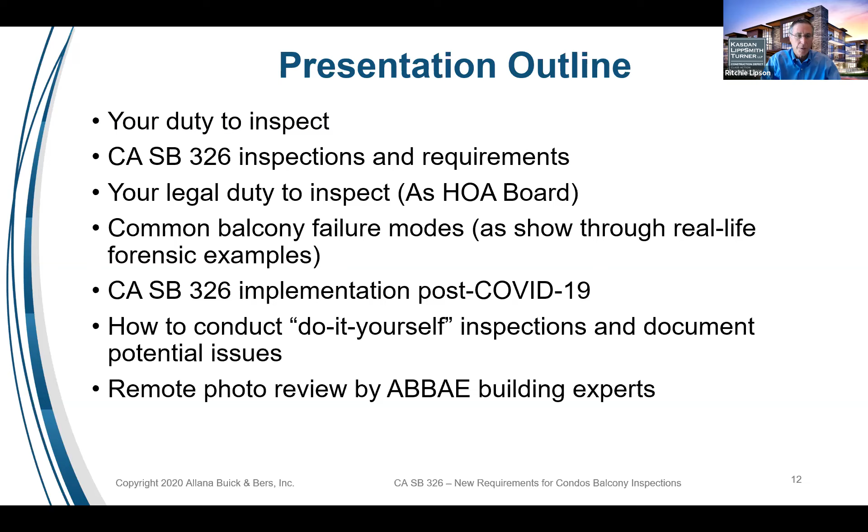Today, we're going to cover a few things. The first thing is the actual duty to inspect. It actually lives and breathes separate and apart from the requirements of SB 326, the inspection requirements for balconies. We're going to talk a little bit about, as a board member, the fiduciary duties that are attached to this duty to inspect. And then Karim's going to get more in detail about why this bill came about, what are common balcony failures, how do you implement SB 326 with COVID going on, and an innovative way of how you can do some self-investigation and self-examination.

So before we get too far into the details of what defects look like and how you can inspect on your own, we have to talk about what the bill says itself. It's not a very long bill. I encourage you all to go, you can just Google SB 326 and you can get the text. It's really a very short bill. But there is some important detail to know about. And the first thing is in the definitions section. So the first thing that is required is a visual inspection by a licensed architect or structural engineer of the exterior elevated elements.

Some of you might have heard about SB 721, which was a balcony inspection bill that applies to apartments. We were on the Legislative Action Committee for CAI, which right at the last minute carved out homeowner associations from SB 721. We may refer to some of that today because it's different, but we've both had some experience with 721, which has been in place for a year. So some nice, valuable lessons we've learned from it. So a visual inspection by a licensed architect or structural engineer is required under SB 326.

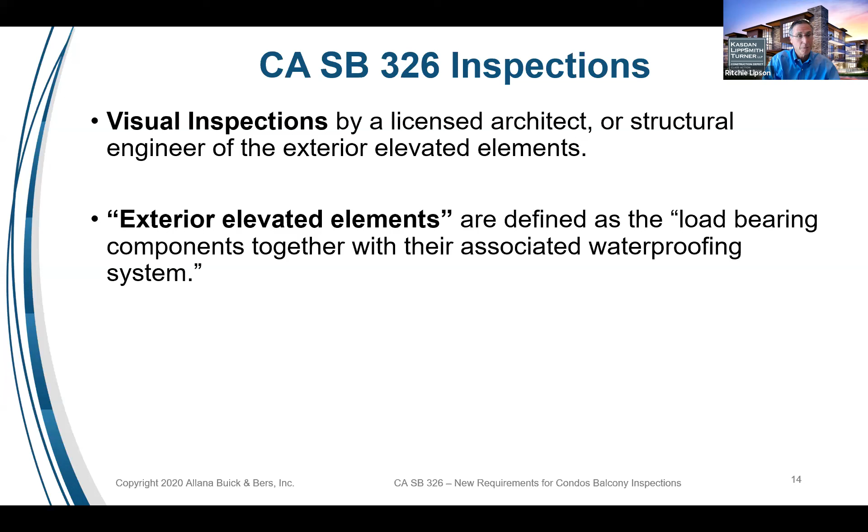What do you have to inspect? Exterior elevated elements. They're defined as the load-bearing components together with their associated waterproofing systems. What does that mean? Well, it's defined in the bill. So go ahead to the next slide, Karim, and we'll talk about what load-bearing components are and associated waterproofing elements. So associated waterproofing elements of wood frame balconies include flashings, membranes, coatings, sealants that protect the load-bearing components of exterior elevated elements from exposure to water. So it's basically everything that goes into creating the waterproofing system of balconies.

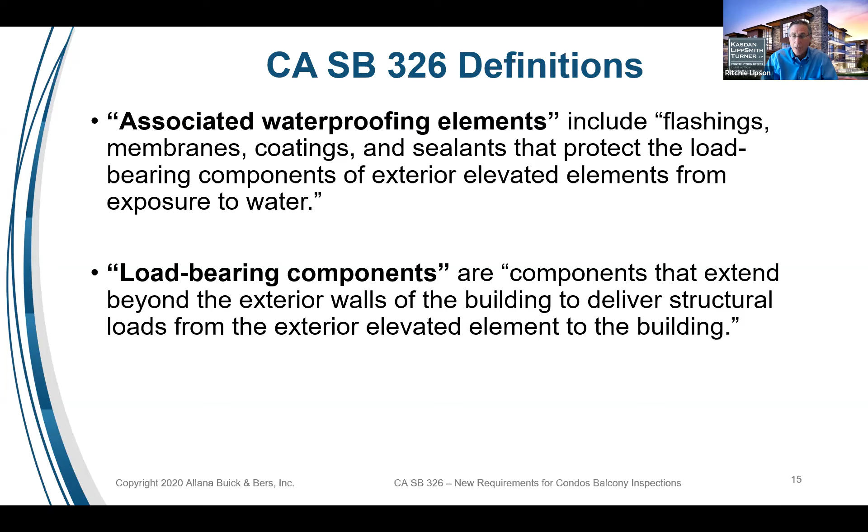And we'll talk a little bit about, it's also elevated walkways. We'll talk about that definition, what's included and not included. But it's a very broad definition. And when you see pictures of what goes into the waterproofing systems, which Karim's going to talk about, there's a lot of things that need to interact with each other properly. Otherwise, the balconies and the elevated walkways have exposure, which can deteriorate the wood framing.

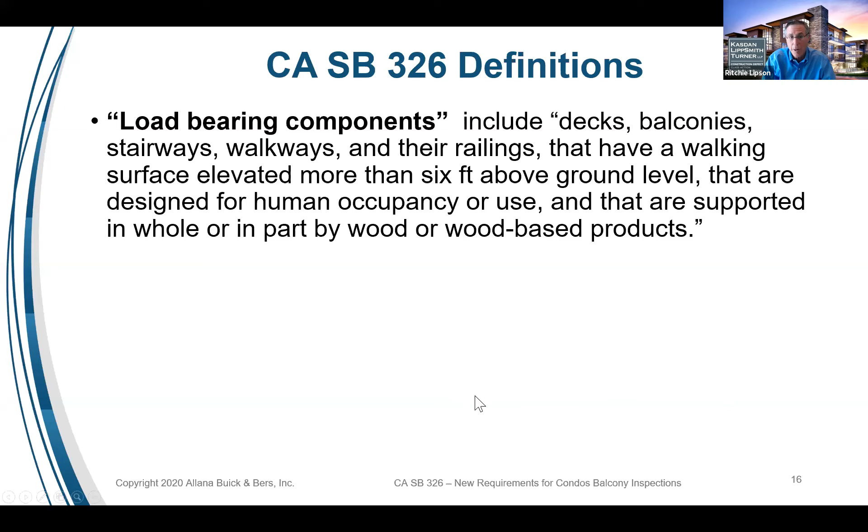A load-bearing component includes decks, balconies, stairways, their railings, and here's the important distinction. It has to be a walking surface elevated more than 6 feet above the ground level that is designed for human occupancy or use and supported in whole or part by wood or wood-based products. So what does that mean? Concrete decks, steel frame walkways, mid and high rises, not going to be applicable. You're not going to have to look at those systems because they're not generally made in whole or part with wood or wood-based products. Not included are the little Juliet balconies you see all the time. A lot of architects will use that. If you can't walk on them, it's not included in the definition.

What inspections have to be done and when do they have to be done? So the first requirement is that at least every 9 years you have to complete the inspection. And that's first round inspections though has to be done by 1/1/25.

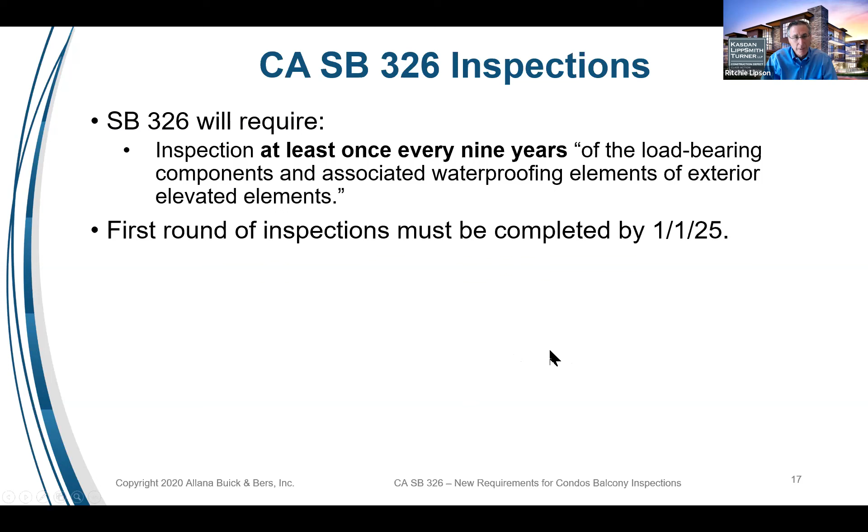And there's a real risk we'll talk about a little bit later about waiting too long. We've seen this in all the type of bills that have deadlines like earthquake retrofits in Los Angeles and other areas. People wait till the last minute, and then you can't get people to do inspections. You can't make people do repairs. So it's really important to start planning for this now. Go to the next slide, Karim, if you don't mind.

So what kind of inspection is required? And this was a lot of wrangling between the SB 721 balcony bill and this ultimate bill that came out, SB 326. In 721, apartment developers have to actually physically take apart and do intrusive testing of a percentage of the balconies. We were successful when this bill was passed to take that out. But there still, and Karim will get into this in detail, there still are a lot of requirements associated with how you determine if the waterproofing elements are put together properly.

So what the bill says is that the visual inspection will be the least intrusive method necessary to inspect the load-bearing components. It includes visual observation. Go back one more, let me just finish that. In conjunction with moisture meters, borescopes, infrared technology. So each exterior element that's found to be defective, decayed, or deteriorated or does not meet its load requirements, that would constitute a threat to life safety or health or safety. So this is a life safety bill. It's important to remember that.

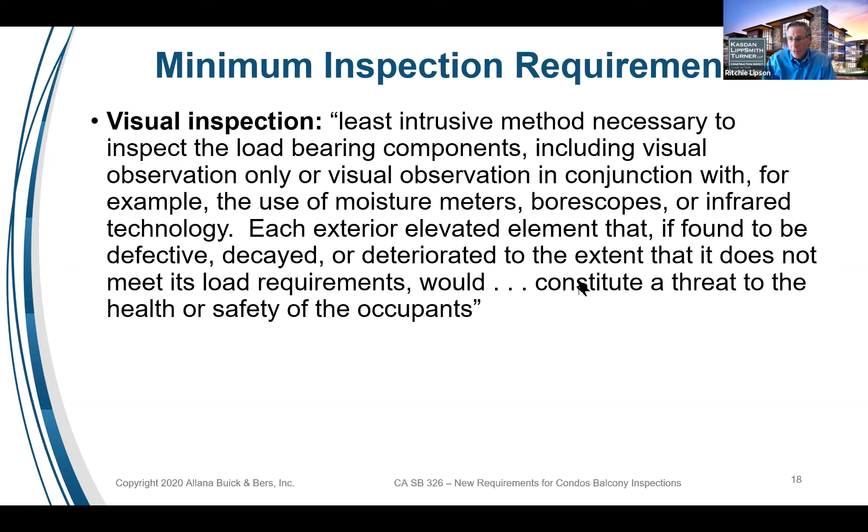And the burden is going to be on the architect and the structural engineer. And Karim's going to talk about how that burden is going to be satisfied through his inspection. So go to the next slide. Thank you. So after the inspections are done, what kind of reports are required? What do you have to do? The bill specifically provides that a written report needs to be issued. It doesn't really say when, unless it's immediate threat to life safety, but it does lay out the requirements.

So the first thing the report has to cover is a description of what the load-bearing components and associated waterproofing systems are. It has to state what the current physical condition is of both and whether there's any issue or immediate threat with health or safety. It has to identify what the expected future performance and useful life is, basically a reserve study analysis, and then go a step farther and say what repair or replacement is recommended.

That report has to be stamped by the professional, the architect or the structural engineer, and presented to the board. Then any impact on the existing reserve study needs to be incorporated. If a 10-year deck is now going to last 5 years, then you have to redo your reserves based on that new useful life recommendation. Go ahead to the next one.

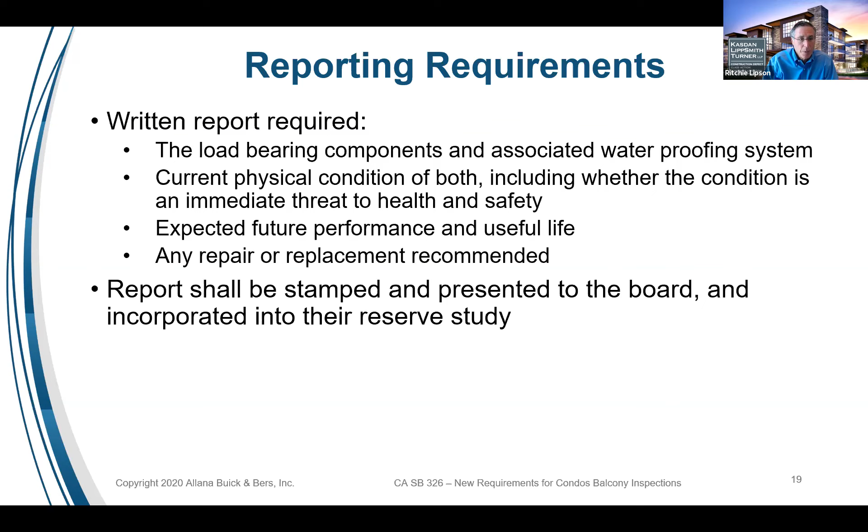Now here's the key. If the inspector determines that there's an immediate threat to safety or life, then that report must be presented to the association immediately upon completion. And you have to get the local enforcement agency, the building department, involved within 15 days. So basically, depending on the scope of this, you're going to have to shut down your elevated walkways, your balconies until you make repairs because it's a life safety issue.

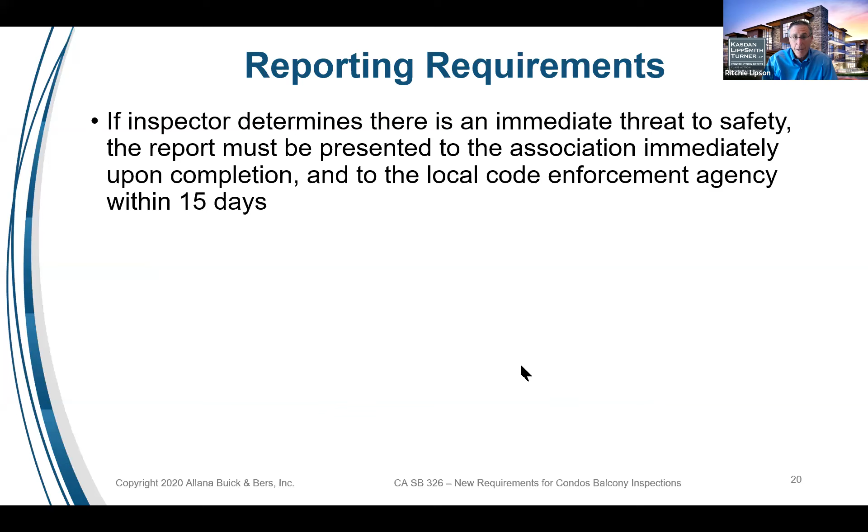What does the bill provide in terms of repair obligations? Okay, well, it requires that if you have a life safety threat, obviously you need to take immediate preventative measures, including preventing occupant access until the repairs have been inspected and approved by the local enforcement agency. So you're going to have to get a permit more than likely. And for that time, you're going to have to restrict access to the balconies or the walkways until this immediate threat of life safety is repaired.

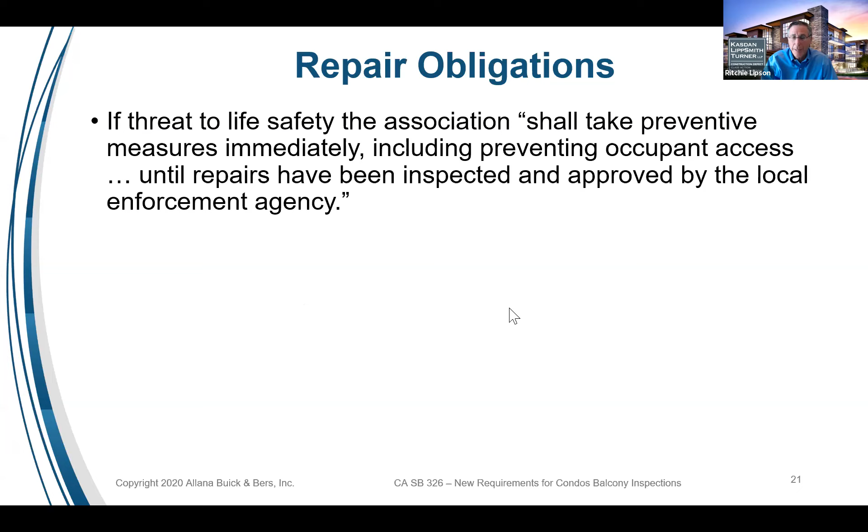And we've had multiple cases where we actually have to not allow members to get on decks because of either railing issues or where there's actual life safety or structural challenge with a balcony or elevated walkway. So that's what the bill requires, and it's detailed, and it's important that whoever you hire to do these investigations make sure that they comply with the bill, because you don't want to do it twice.

But let's backtrack a little bit and talk about this duty to inspect separate and apart from the SB 326 requirements. And it's important because if you're out doing balcony inspection and you already have a pre-existing duty to inspect, you need to look at everything. I mean, that was existing before SB 326. And we were actually successful to get this balcony inspection for the HOAs taken out of SB 721, the apartment bill, with this argument that there already was an independent duty of boards and associations to conduct investigations. So that's why we were successful in getting out of that initial bill.

The requirements that exist already are really threefold. One, CC&Rs. CC&Rs often, especially newer condominiums, will require expert independent inspections, either annually, could be every 3 years. You'd see those provisions in the CC&Rs, and it's important to look for those and find them.

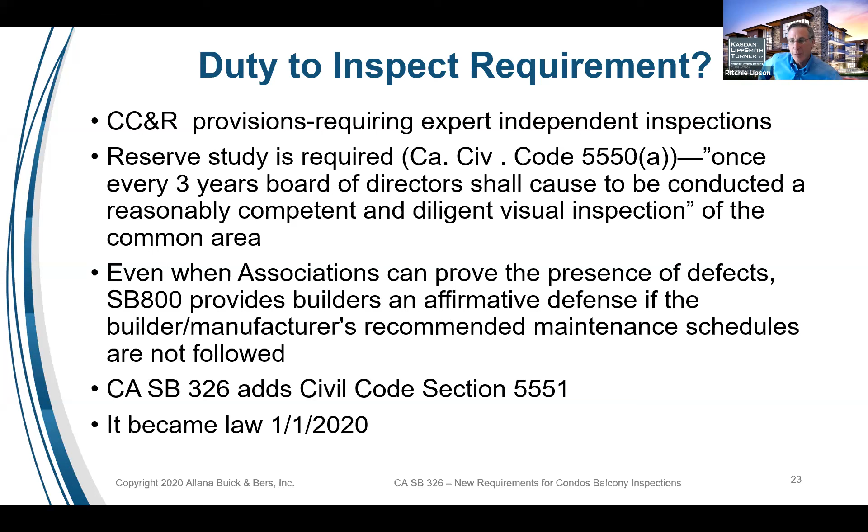There's a few cases that also have arisen around the country, and it really comes up like this. Association is not looking and investigating their projects. A statute of limitations is blown. You wait too long to bring claims. You then have to special assess members for repairs that could have been paid for by the developer. And then members in the community sue the association for your failure to investigate and failure to bring claims.

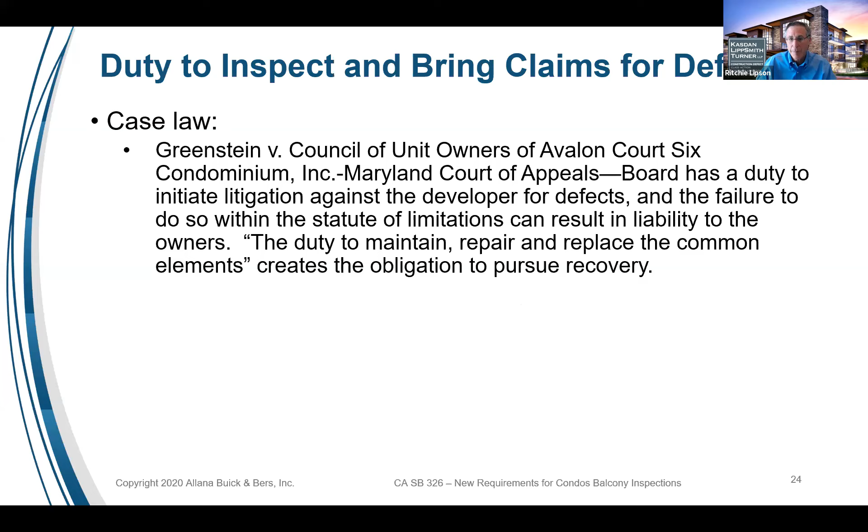So we've recently seen a case in Maryland, which basically said, if you've got a duty to maintain the common area, that equals the duty to inspect, and that equals this duty to bring claims if you find defects. You can't just stick your head in the sand. And there's another new one, go to the next slide, in South Carolina, about 1.5 years, 2 years old. Same thing, and these are Court of Appeals cases.

Now in California, we haven't had any appellate court rulings yet that are directly on point about this issue, but I don't think it's a large stretch to say, hey, you've got this fiduciary responsibility to maintain the common area in a safe manner, which equals reasonable investigation.

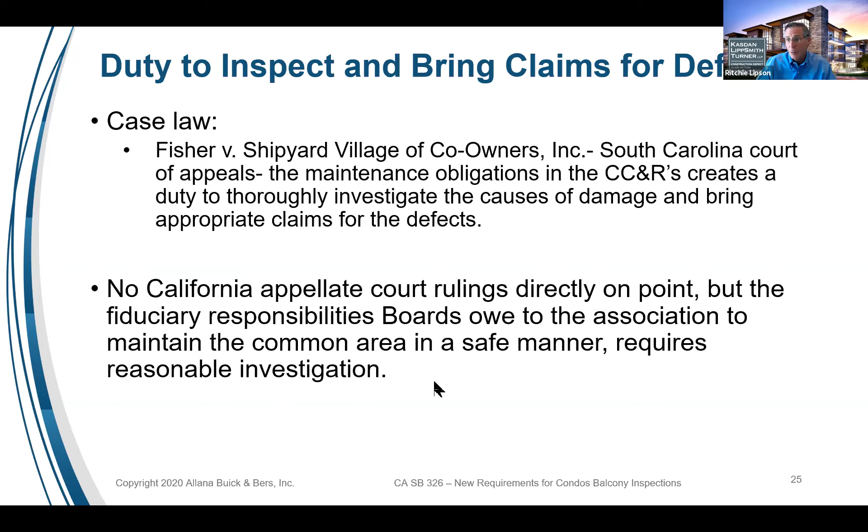And lastly, important thing to remember is that your D&O coverage, your directors and officers insurance that you have to cover these kind of claims, say you've blown the statute of limitations and now you special assess and members bring claims, they specifically exclude coverage for claims for failure to act when it relates to construction defects. And some of them are very broad.

Depending on what your policy says, you have a real exposure for no insurance coverage if a member brings a claim later against the board for failure to investigate and failure to bring claims for construction defects. So that's important, the way that ties into SB 326. Go to the next slide, Karim.

So that is the bill in 20 minutes or less. It's 3 years of lobbying that went on to get to this bill. It is very, very in-depth and it's going to have a lot of impact on associations the next couple of years. And I think when you hear Karim's presentation about the technical aspects of this, you're going to have a much better view of why it's so important to look at this. So I'll turn it over to Karim.

Thank you so much, Ritchie. That was very informative.

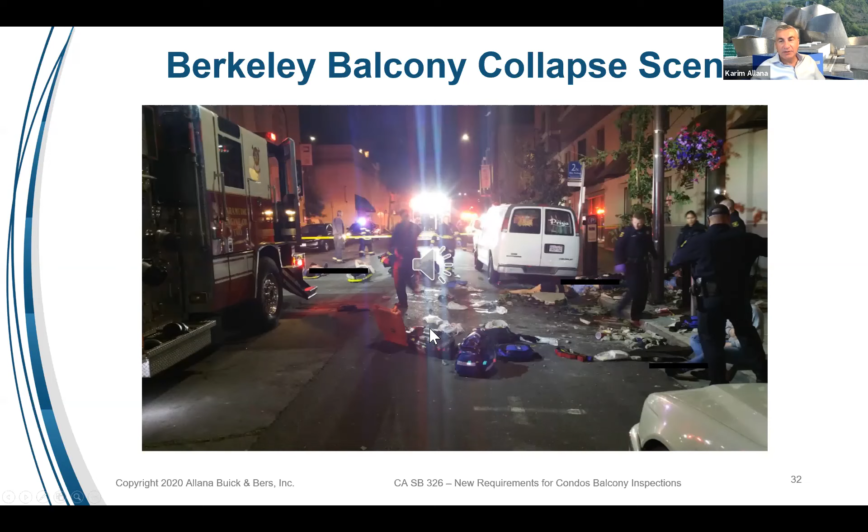It was a small balcony packed with a lot of people, but that's not the cause of the failure. Structurally speaking, this balcony was actually designed to be twice as strong as required by code. You could easily have 10 or 11 or 12 people on there, so it shouldn't have been an issue at all. The problem was water intrusion, and water was intruding into the balcony.

So this is a picture standing on a scaffold looking at the part of the structure that's still left on the building. Here's the balcony door above us, and here are the structural cantilevered beams coming out to pick up the balcony load, the floor joists and the rim joists. And you can see how rotted they are. These are made out of engineered lumber. Engineered lumber, like glulam beams and composite beams, is very, very strong.

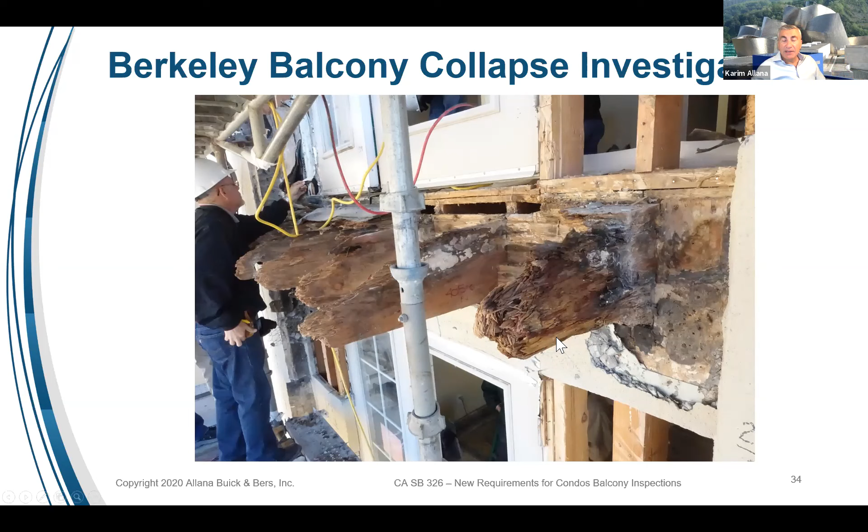And engineered lumber like this is extraordinarily strong, but unfortunately, when it gets wet, it can fail catastrophically. It can, boom, just go without any kind of notice, any kind of deep sagging. There was a little bit of sagging noticed in these beams, in these balconies, but then again, there were a lot of people on the balcony as well.

And so when you look at it from the outside, and I'll remind you of the picture here where we were seeing the underside of this balcony, it looked pretty clean. You don't see anything because the underside is stucco, and you don't really see any obvious signs that something is failing.

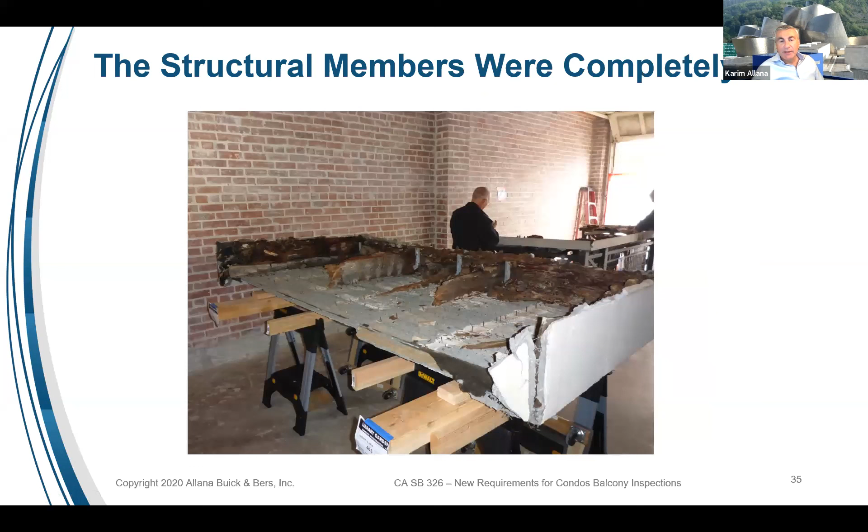In fact, the code at the time didn't allow for the underside of the balcony to be vented. So there were no vents. And so any moisture that got in would just get trapped. And that trapped moisture would just erode away and rot away the wood until it finally collapsed. So this is an extreme case, the Berkeley collapse.

And in the last 10 years, I've probably seen 20, maybe 30 such balconies that were about ready to collapse, had we not intervened, had we not seen the tiny little signs that we could make out on a visual inspection, which prompted more serious destructive testing and led to us making those balconies safe.

But had we not caught those, in the thousands that we looked at, there would have been maybe 10 to 20 that could have collapsed, that could have had this type of damage. So the visible signs are very, very low, okay? And so you have to be an expert to really detect it. You have to be an expert that understands what to look for.

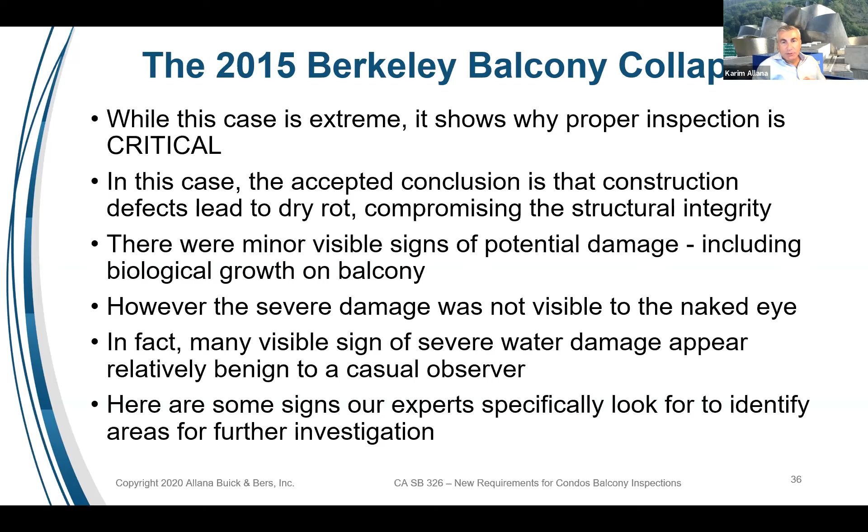And I'm gonna share those photos with you. I'm gonna share that experience with you today so you get a sense of what to look for. And so first of all, like Ritchie was explaining, there are a number of structures, elevated decks that are covered by SB 326. So what are they, right?

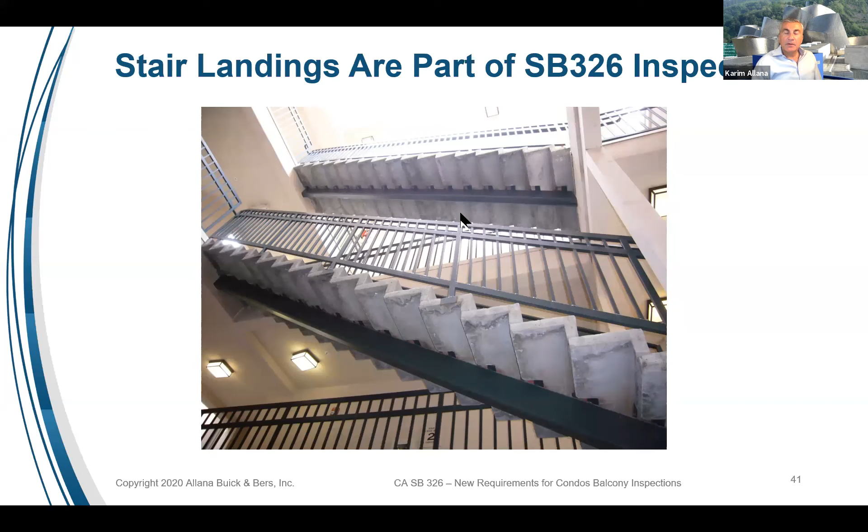Somebody also asked the question whether these balconies, which are covered and are not cantilevered, are required to be inspected. The answer is yes, these are also required to be inspected. So long as they're made out of wood and the supporting framing structure is wood, they're supposed to be inspected.

The other question that got asked is whether a deck structure that is on top of a garage or a flat roof also needs to be inspected as part of SB 326. SB 326 simply says that it's a walking surface. People are going to be walking on it. And if there's a part of the roof that you're using as an amenity deck where people can congregate on it and utilize it, then that would qualify.

I can tell you that I walked on many roofs in my lifetime. And I remember the scariest one that still sticks out in my head. I was walking on top of a gymnasium roof, and this gymnasium was 30 feet high, so there was a very high ceiling inside. I was walking on a very firm roof, and my foot went right through part of the roof. Half of my body was down through the hole in the roof because the roof was rotted.

Any other questions? Okay. Thank you for your questions, because it's important for us to understand what you're thinking and to be able to answer your questions. So now I'm going to talk about, does water leak? How does water leak? How does damage actually occur? This is a plan view of a balcony. Here's a sliding door at the top.

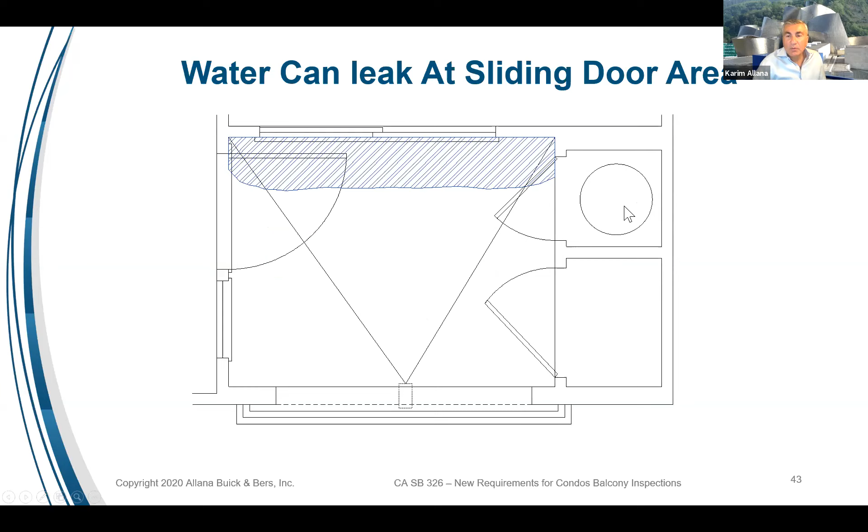Here's a little closet that has the hot water heater. This is a little storage closet off of the balcony on the right on the bottom side. And so you could have a side entrance door.

When you look at a balcony on the perimeter, it's got lots of doors. You know, it could have a sliding door, it can have man doors, it can have entrance doors. And so the perimeters are quite busy with flashings and door thresholds, which can all become a part of an area where water can get in.

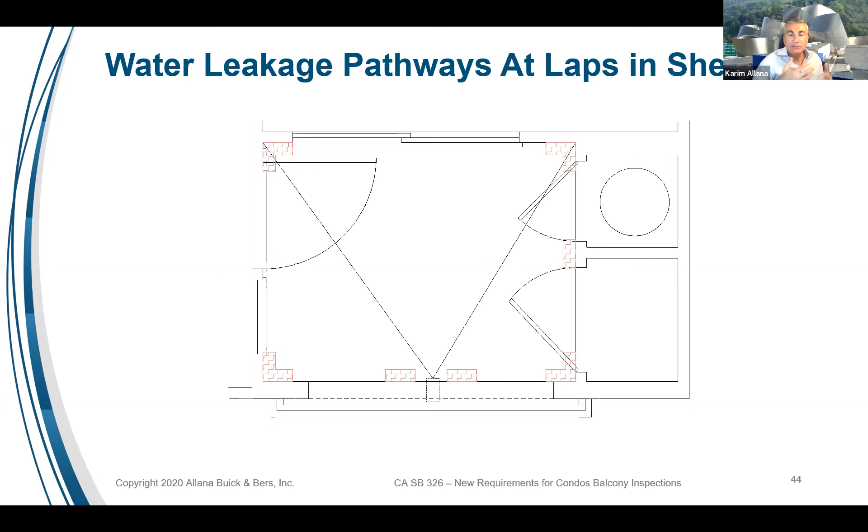So each of these areas, at doors and ends and corners, they all have sheet metal type flashings that are lapped. And the laps in the sheet metal flashings can become a pathway for water. So each of these red highlighted areas are potential for water intrusion. And there are many, many such areas for water intrusion in a balcony.

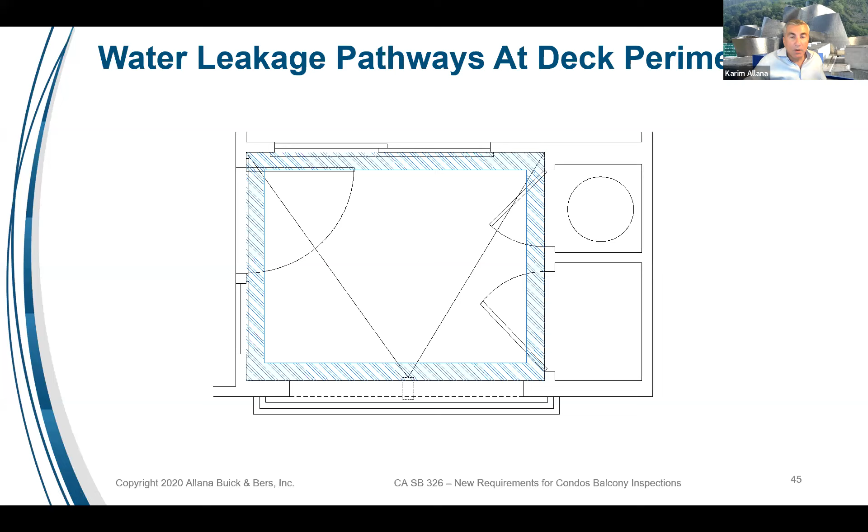Like the whole sheet metal flashing itself may have been done wrong. And if the perimeter of the deck isn't properly watertight, water could intrude from any one of these perimeter areas. Actually, it doesn't have to fail right through the waterproofing membrane. Another vulnerable area is in the front, the scupper, because all the water gets directed to the scupper. The area in front of the scupper could be potentially leaking.

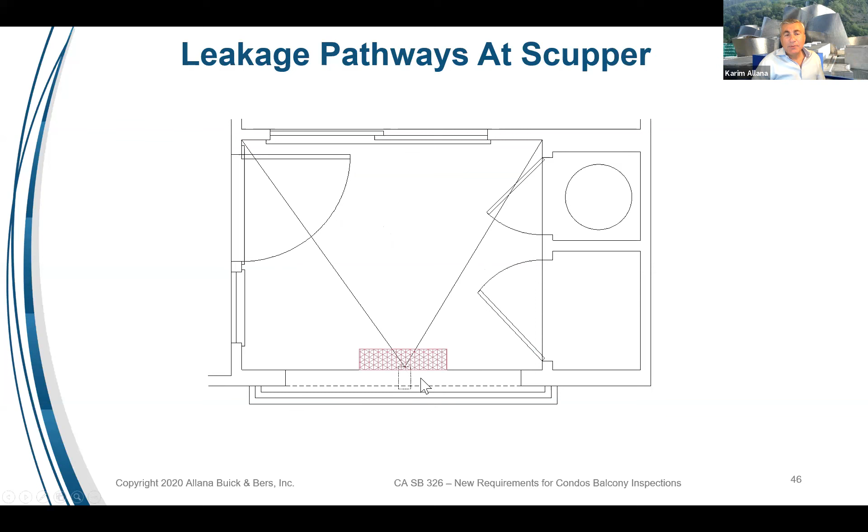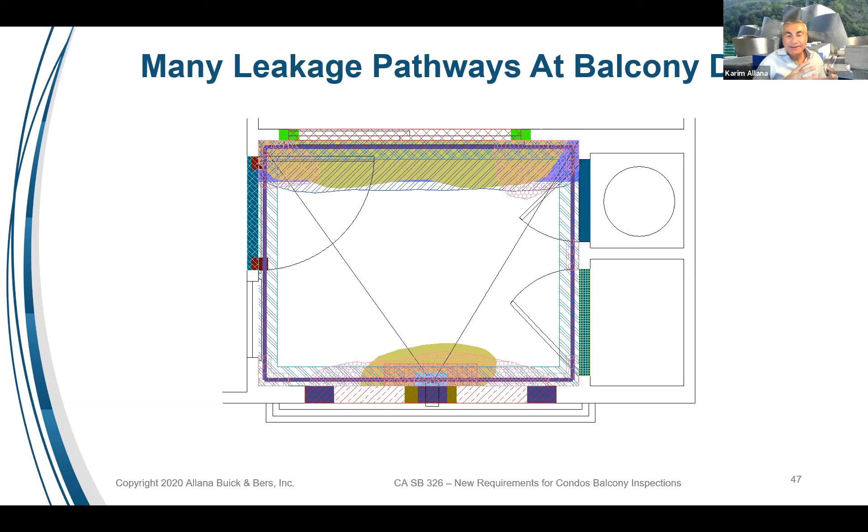When you add up all the places in a balcony that are vulnerable, this is just a composite drawing that shows all the different areas that could introduce water into the balcony. There's a lot of areas where water can come in, right? So as an expert, as I look at this, I know that I'm looking for all the vulnerabilities on a balcony like this. And ultimately, if there is leakage, most of the water stays contained in the balcony or the elevated deck assembly or the stair landing.

So if you look from underneath, you don't see much. You see very, very slight signs of leakage. Most of the water stays contained in the wall cavities. Most of the water will stay contained in the deck itself, in the structural members of the deck. So water just gets absorbed like a sponge into these areas, and it'll just sit there and start to rot things away because it's coming in from all these different areas, and you don't know it, right?

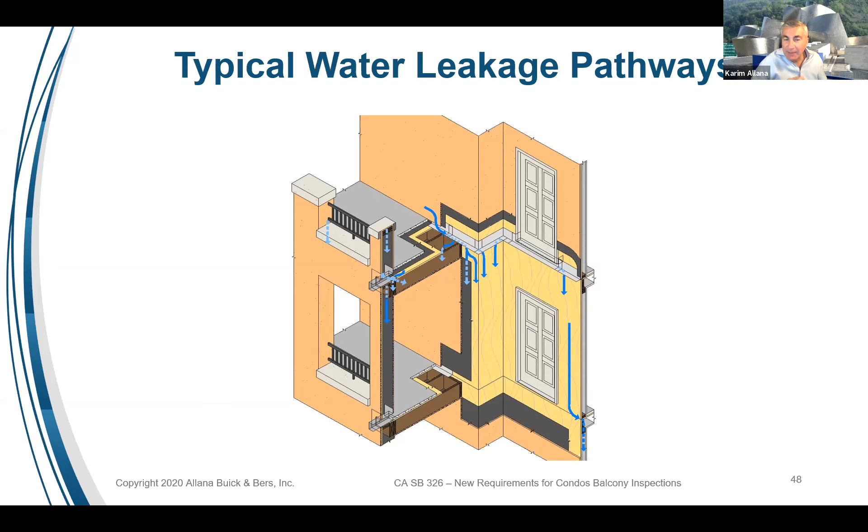So I'm looking for signs that I've seen when water intrusion is happening like this. There are some signs, and I'm going to show you what those signs are and how they look, what's the tip of the iceberg. And I'll talk about the tip of the iceberg a lot, but these signs are not always obvious. These are pretty difficult to recognize.

One of the questions that came up was, do you need to open an area on each balcony and walkway to complete the inspection? The fact of the matter is that we need a certain amount of exposed area, but we don't necessarily need to do destructive testing on every balcony. And I'll show you what we need to see and what we are typically looking for before we'll get into the destructive testing.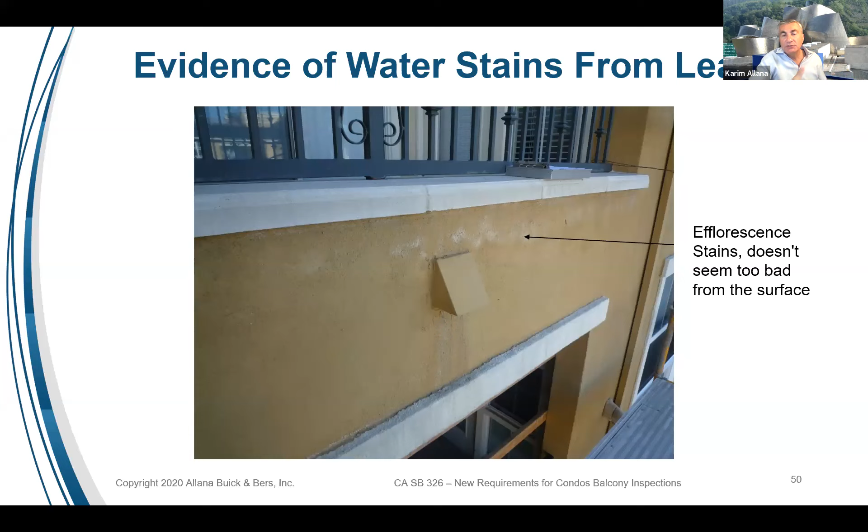As the water that's inside the wall is drying out, it brings the salts that are in the cement plaster, in the 1-inch thick stucco. It's bringing the salts out of the walls, and it's then drying to the surface. So these salts are getting drawn out with water.

So if there's efflorescence, that means there's enough water getting in behind the stucco that's now trying to dry to the outside, which creates this staining. I look for this and I go, I've got to look at this more carefully because this could be a problem.

Here's another obvious sign, right? There's a little bit of staining that we see. In fact, there's a little bit of staining you can see even on the ceiling of this particular balcony. And there's obviously some staining here. You can see that the staining is not just water dribbling down the stucco, but it's definitely got some coloration to it and some brownish type of colors to it.

And usually wood and waterproofing membranes, when they get wet and water runs off of these wet areas, it produces what we call tobacco juicing. Tobacco juicing is brown colored stains that, to use a crude word as the way it came from, is when people were chewing tobacco and spitting, you see the brown tobacco juicing.

And that's really where the terminology came from. But it is a term of art that is used by the roofing and waterproofing industry a lot. And they talk about tobacco juicing. And so tobacco juicing is what we're really looking for. And it's very hard to see, but all you see here is a very slight amount of staining in the ceiling here, and you see some strong ceiling stains in the front part of the balcony.

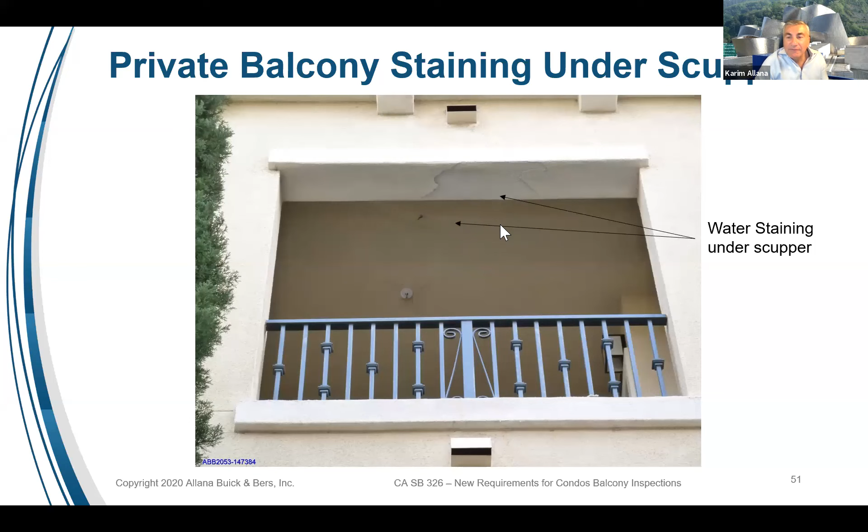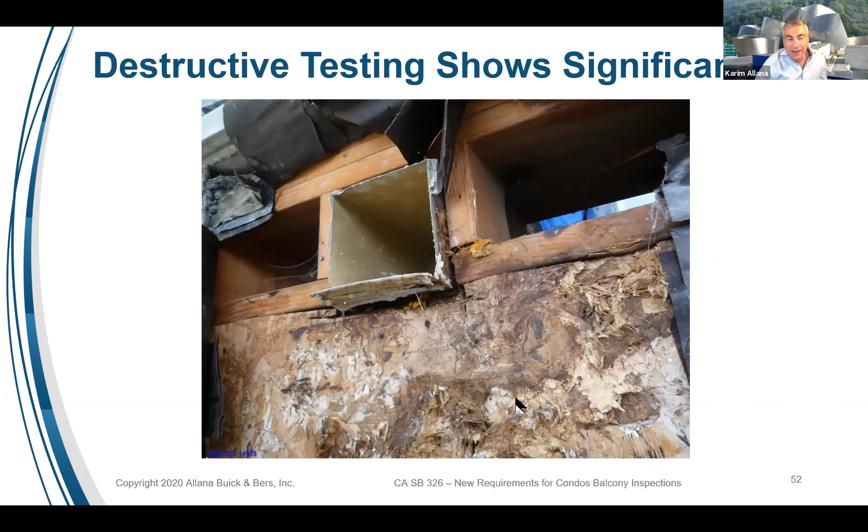Okay, and to me, I'd be investigating that. Here's what we find when we get behind such minor staining. See a lot of significant rot. So a small little stain, even a couple of drops of tobacco juicing type of stains, could mean that you have such severe rot. Okay, so the warning signs are very, very little. They're not easy to spot. So you want to see the warning signs of these.

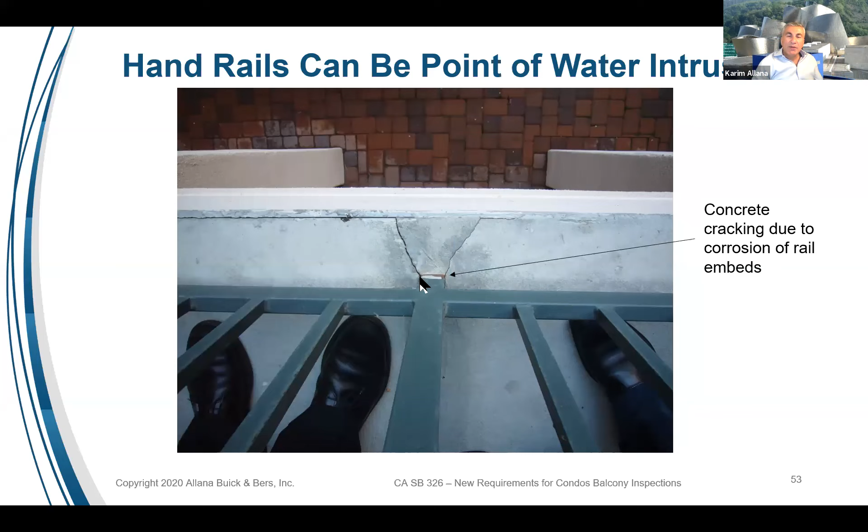And here's one of the warning signs that I look for. Here's a handrail penetration that has cracks emanating from it. You can also see at the base of this handrail, there's some rust. Okay, there's rust because there's moisture accumulating. It's causing that handrail to rust, and it's causing that concrete to blow out and spall, because when metal rusts, it expands. And as it expands, it's pushing the concrete, it's cracking the concrete. And so I'm looking at signs like this thinking, okay, that could mean that there might be a waterproofing flashing failure here, because there is rust going on in this handrail.

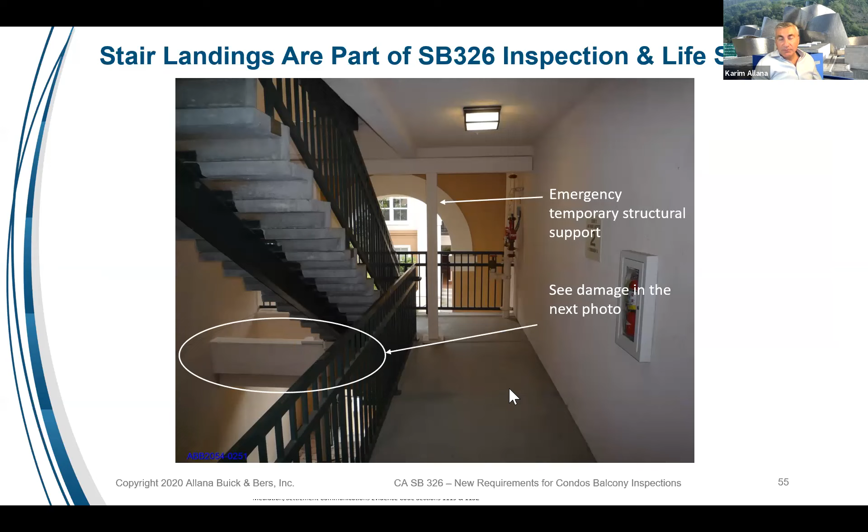Here's some more examples. Here's a stair. In this instance, I saw some damage down here at the balcony. There were some cracks, and I'll show you a close-up shot of this. And before we even did any destructive testing and opened it up, I asked the owners to shore it. So here's the temporary shoring and columns that were put up just to make sure that this staircase remains safe, okay, for people's entry.

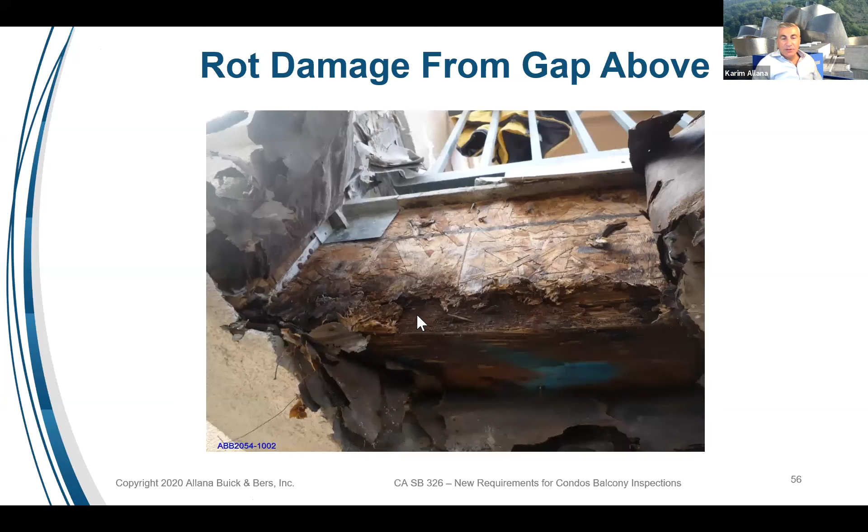And you can see that the amount of opening in the wall is not that much. You only have this much opening in the wall that's allowing wind-driven rain to come in. So it's not like open to the sky completely, but there's some level of wind-driven rain that falls on this balcony, on this landing. Here's a close-up shot of how damaged this was. Okay, so it has quite a bit of damage from this landing.

Anytime you see water coming out through the crack of a stucco wall, it's a problem. Generally, that shouldn't happen. Cracks should be minor. They should be hairline. Water can get inside of the cracks, but there's building paper that usually manages this water. If it's incidental, it's not going to cause a major problem.

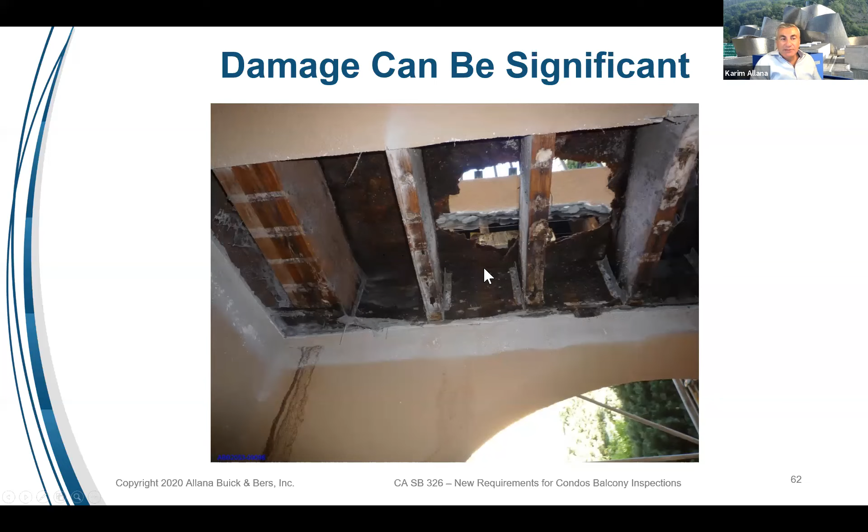And then when you see that, the damage could be a lot more extensive. So that's really an important distinction. It's important to know that you're looking for minor little damage like this, okay? Any questions about this?

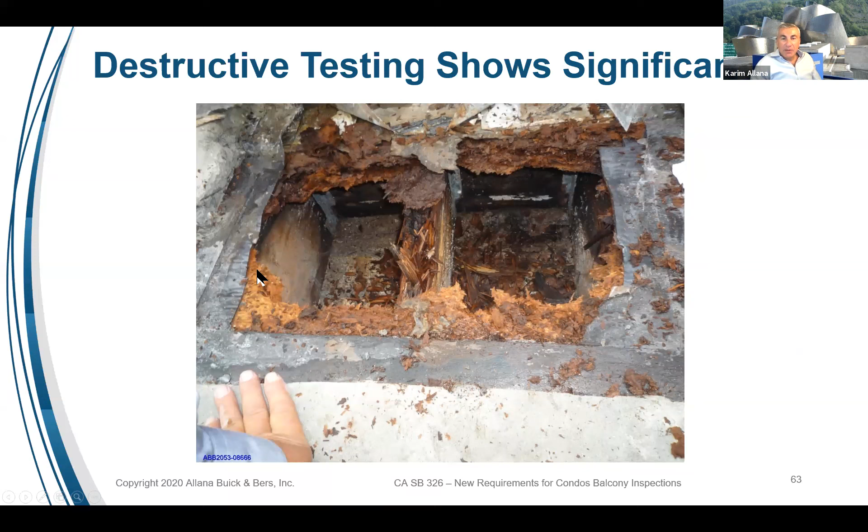So here's some more, again, here's a topping slab. This is looking at it from the top down. This is how rotted the plywood is, okay, and the framing members. And if you were walking on this concrete topping slab, you never would have known that the wood underneath it is so far rotted.

The unfortunate people that were in the Berkeley apartment collapse, they were walking on that deck, they didn't know. Had they known it was rotted like this, they wouldn't be walking on it. So the problem is that you can't see it. And that's why this law and this bill was passed, so that people would be alerted to significant damage that could be there. The signs of this damage are very, very low.

So a question that was asked was, if a complex has recently been painted, how would you do the inspection? So if a complex has been recently painted, if you wanted to do a thorough inspection, you would need to do a probe type of inspection, where we would drill little holes, go in with a borescope and look at critical elements. You would need an expert. You wouldn't be able to do it yourself, okay?

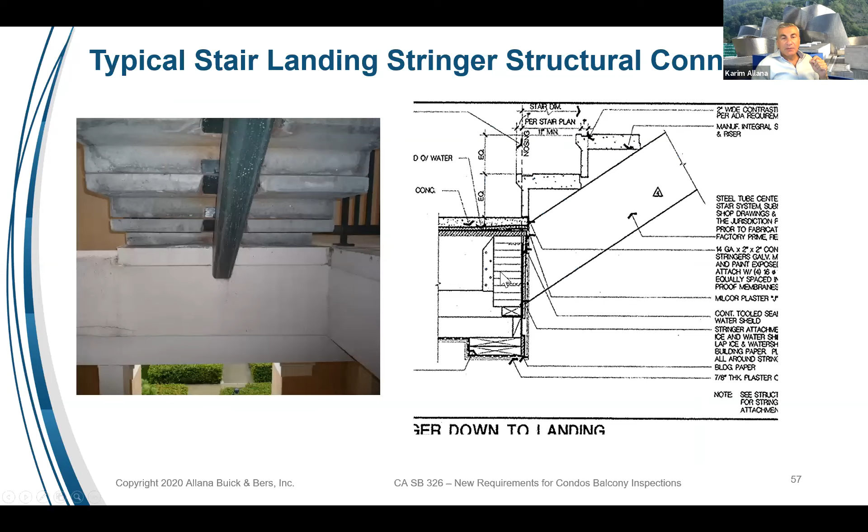You would need an expert to come in and look for signs like, what do things look like from the top? Like, for example, these kinds of signs. And I would be looking for construction and seeing how it was built. And could this construction be defective?

One of the things that I want to point out here is that this metal that's used is flashing. It's a defective kind of flashing, okay? I know this because it's made out of aluminum. It's extruded aluminum. It's not a flashing. It's actually a formwork to keep the concrete intact on the topping slab. So it's really installed for the topping slab.

But the waterproofing people, contractors, general contractors, subcontractors, use this kind of flashing, okay, for waterproofing. They'll terminate the waterproofing to this piece of metal. The Berkeley collapse had the same exact metal. Every time I see this metal, I know there's a problem, right? 99.9% of the time when a piece of metal like this is used as a flashing, it doesn't work.

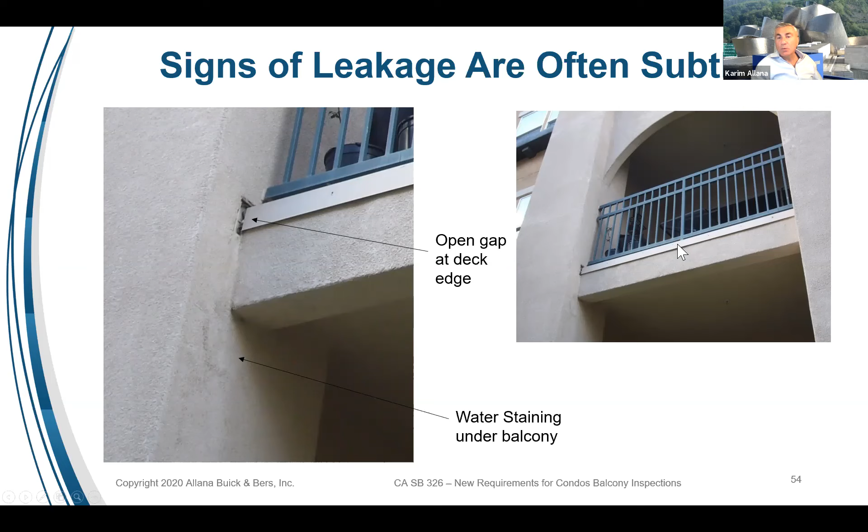So for me as an expert, I'm looking for lots of other things that you're not. I'm going to be teaching you what to look for yourself and how to find things yourself.

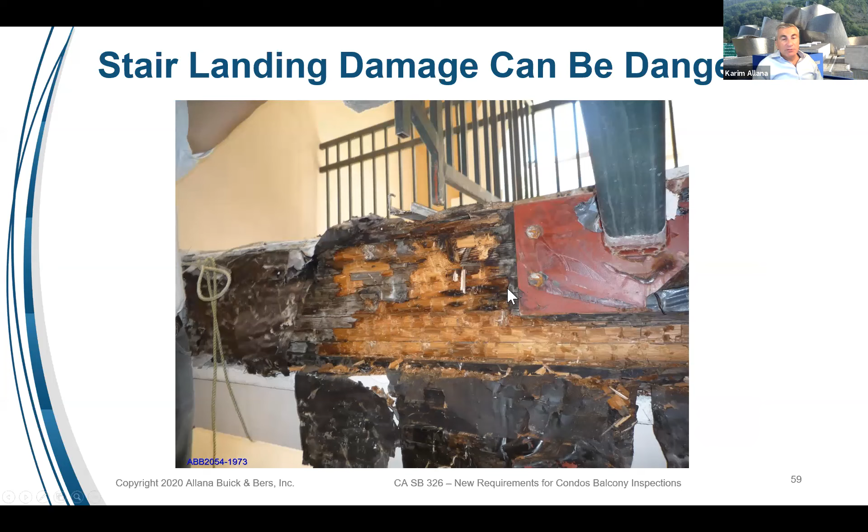One of the questions that somebody asked is, do you have examples where the balcony is a concrete slab, but the posts are wood? In fact, most of these examples that I was showing you, there is a concrete slab on these balconies. But underneath the concrete slab, it's all wood. Okay, here the landing is made out of concrete, but the slab is here. Again, if you looked at the top, there's concrete.

It's not wood. So in the majority of the buildings, you're not just going to find a post that's wood. All the framing members are going to be wood. Okay, and just the concrete topping slab doesn't mean that it's a concrete building. It's not a concrete building just because the topping slab is concrete.

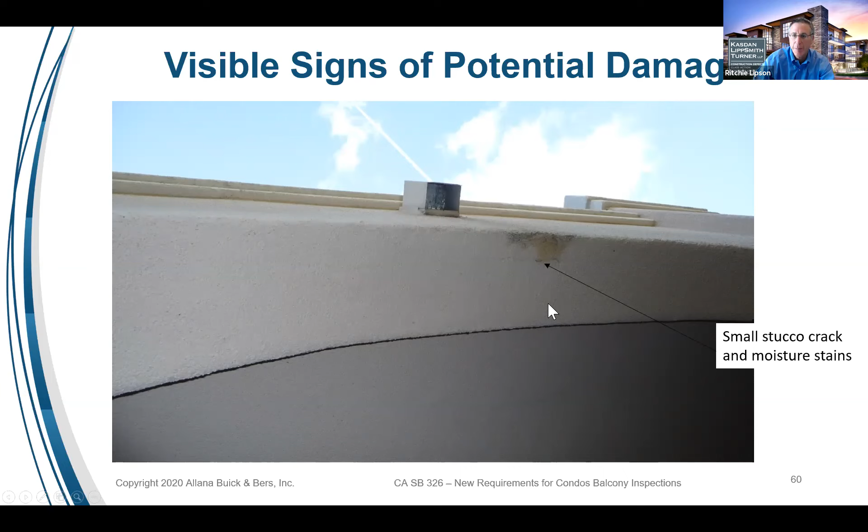We had a few questions also, Karim, about when to do these and what would be the advantage of doing them now versus later. So I think we reviewed that the bill requires inspection every 9 years, but the first inspection has to be done by 1/1/25. The advantage of doing them earlier rather than later is a few things. One, like we talked about before, a municipality could pass a more stringent bill, which means you might have a burden. Berkeley does have one. Berkeley did, San Francisco already does, right?

And second, if you do find construction defects, and we all know that SB 800 has certain timeframes associated with bringing claims, so you don't want to miss any of those timeframes, because if there are defects, the better approach would be to have the developer pay for those.

If you wait till the last minute, and you tell me, Karim, if people are doing these right before 2025, there's just not going to be enough qualified people to do the kind of inspections you need. So waiting until the last minute is never a good tool. And even further, if there's damage occurring, you want to get it early, because by waiting, you're just allowing more damage, which can result in a more expensive repair potentially. So we always recommend sooner than later.

More importantly, if your project is less than 10 years old, you must inspect. Don't even think about the date that you have and the deadline for 2025. Inspect it. If your project is less than 10 years old and you're about to paint it, I strongly urge you not to paint it and have the inspection done before painting it.

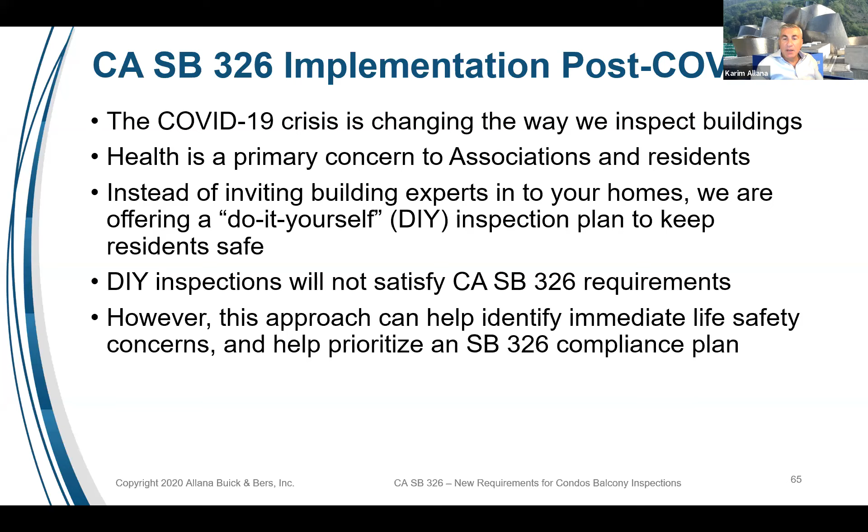And if a whole bunch of concerned people did it and sent us photos, it's a great way to learn if there is a potential problem. And we'll look at these photos and we'll send you a reply back on what we see for free. You'll get this advice from us for free, and then you'll at least have an idea whether you have a potential problem or not. And you may want to hurry up and do this inspection sooner than later if you really do have a problem. So how do we go through this process?

In the previous slides, I showed you what types of things we're looking for. We're looking for the tiniest stains. We're looking for cracks that have potential; it looks like water's coming out through the crack in the stucco. We're looking at siding that may have some rot or has, again, signs of moisture. So even when you have those tiny, tiny little stains, you want to take pictures of them. But I want to show you how to go about taking pictures, right?

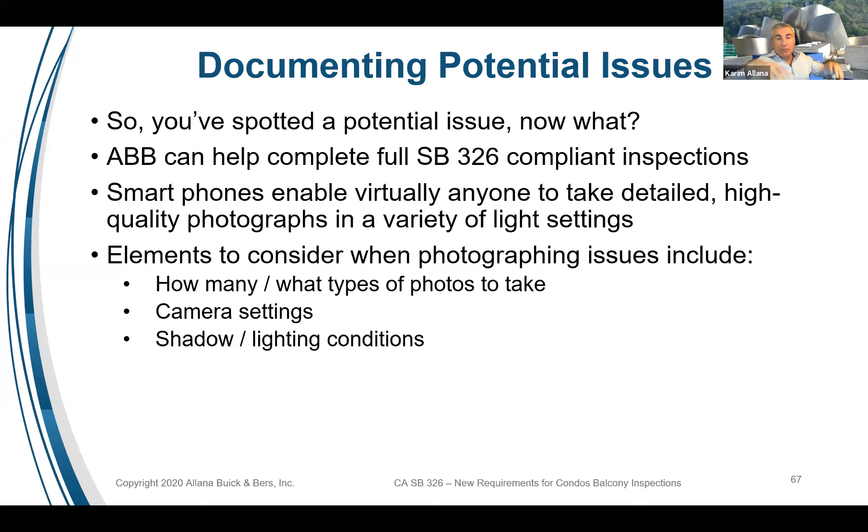You want to take a picture from far away, showing the whole balcony. Maybe you're standing on your own balcony or a landing. You're taking a picture of the whole entire balcony with a wide angle lens. And then you're taking close-up shots of the ceilings of the balcony from your neighbor above. You're taking close-up shots of how the corner of the balcony ends, how the window or the door interfaces with the balcony. So you want to take different kinds of photos.

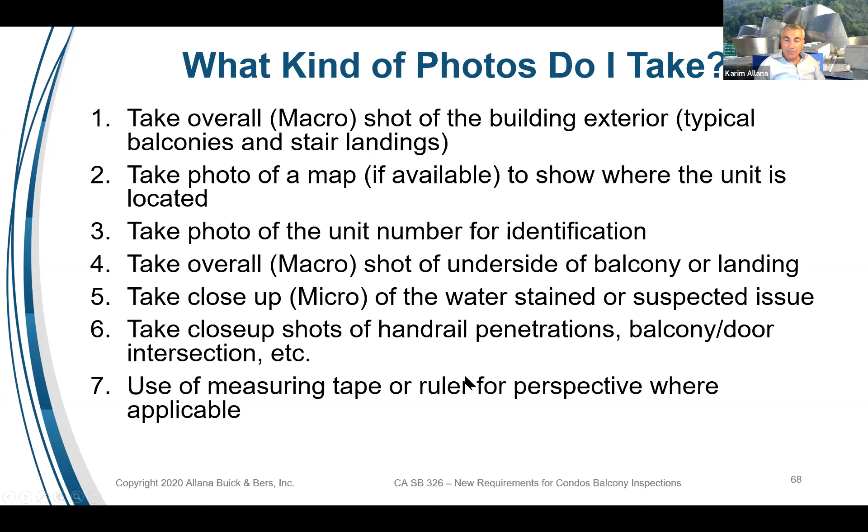You want to take what I call macro photos, which is the overall shot. And you take micro photos, which are the close-up shots, okay? Try and take both. Use a tape measure or ruler to give perspective of how big or small things are. So here's an example of a macro shot. A macro shot is a faraway shot. It could be a shot of this particular balcony that you see down in the foreground, standing on the ground looking up, right?

That's a macro shot. You can also use your emergency exit plan, okay, that's usually on stair landings and in elevators. You can point to where you are. You can say, hey, my finger points to where I am, where my balcony is, where my landing is, what am I looking at? You can just point to this diagram. It's very easy to do because this emergency plan is required to be posted in most places.

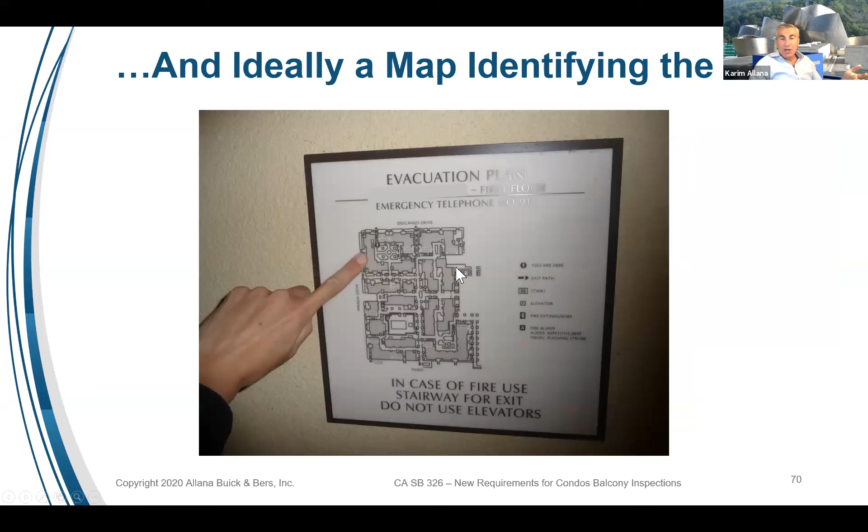Here's the other thing that we look for, the carpet. If you have carpet up to the balcony door, see if you can pry up and pull up the carpet. It's usually just basically matted down onto the carpet tack strip, which has these little tacks in them, and pull it up. It's very easy to pull up, and it's very easy to put back down. Takes a minute or two, and I do this inspection all the time.

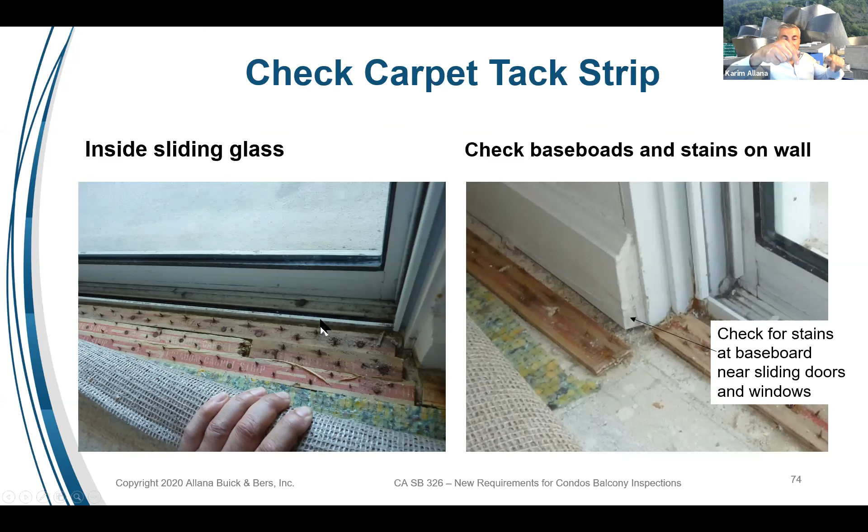So when you see staining like this, there's usually a problem, and it's evidence that moisture is leaking past the balcony door and it's coming inside, which could mean that it's leaking down below and the framing down below is getting damaged.

Here's some more micro shots, close-up shots, right? When you're doing a close-up shot, if you put your hand or fingers in the shot, it gives a perspective of how far away you are, how close up you are. Also see how this threshold is buried in the concrete. It's actually below the surface of the topping slab, which is not a good thing.

Here you can see that the stucco stop is coming almost down to the base of the concrete. And I'm using a tape measure to give an idea that there's only a 1/4 inch gap between the bottom of the stucco and what the scupper looks like. So I have a close-up shot of the scupper with a tape measure to give me perspective of how big the scupper is, how the scupper is done.

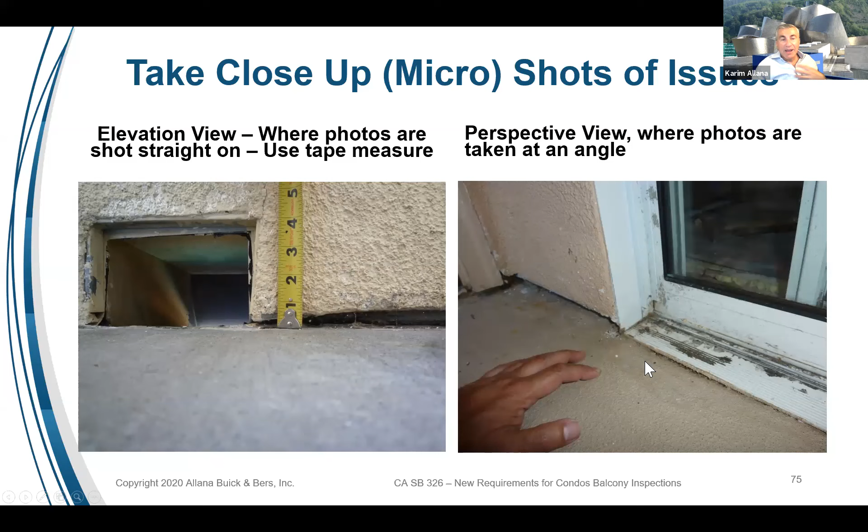And there are other things that I'm seeing here that you might not. I'm looking at this black here on the rim. This is part of the waterproofing that's exposed to the weather. It shouldn't be exposed to the weather, but it is. Right? And so it gives me an idea of what kind of waterproofing might have been used here. So close-up shots are important for many reasons, because I'm gonna look at things that you probably wouldn't be looking for. But if I saw them, I can get a perspective.

Here's a corner of the balcony. These corners are really important, okay? And as you can see, this corner of the balcony has the potential to allow water to get down behind the stucco, okay? This is a very important defect. And if I saw this, I would immediately flag this and say, I think I've got a potential problem, okay? Because this is directing water behind the stucco.

People think that I have a building paper behind my stucco and that building paper is gonna protect me. Therefore, I don't have to worry about it. This water is just gonna go down the building paper and the building paper will drain out at the base of the stucco. That's not the case. A building paper is not waterproofing. It's called weather resistive barrier.

And essentially, its function is to only manage minor amounts of water that come through incidentally, through cracks and other incidental areas where a little bit of water can get in behind the stucco; it'll manage it. This, on the right-hand side, you're directing water that's on the horizontal surface, like a private balcony or a landing, and you're directing that water to go behind that corner. You can't direct any horizontal water running off behind the stucco. Stucco is just not designed, building paper is just not designed to handle this level of water coming into the assembly, okay?

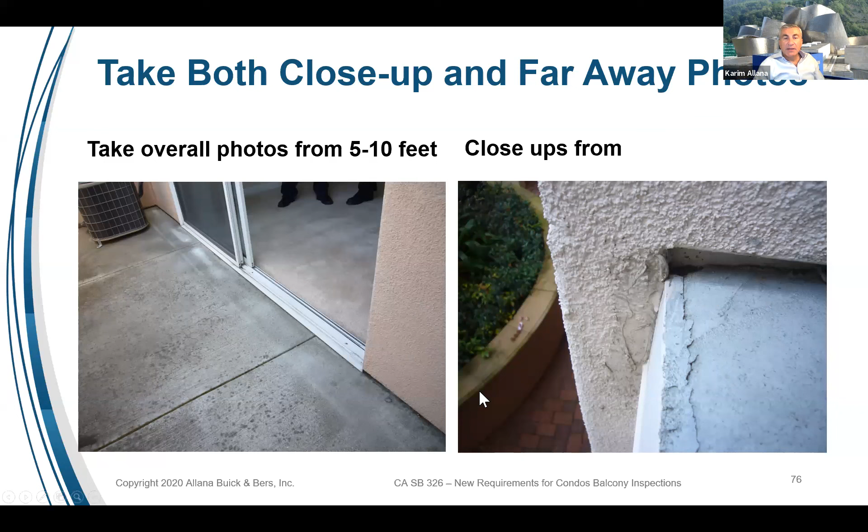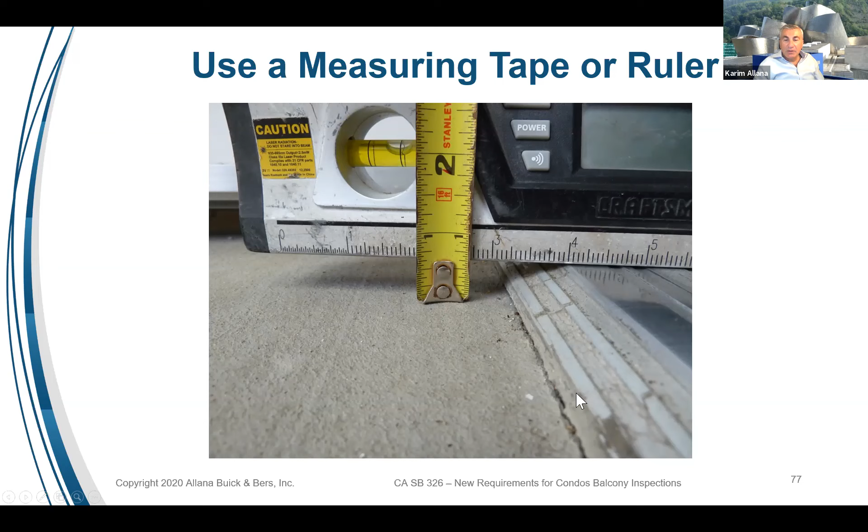So these kinds of close-up shots or overall shots of sliding doors give me an idea of how things are built. This is getting a little technical, but we're measuring how tall the threshold is compared to the outside, once again using a tape measure and a level to do that. You don't have to go to that extent, but close-up shots give me an idea of how things are. Any questions about this?

I've been answering them, Karim, while you've been speaking, so we'll probably have some more come in. Okay.

So here's some more tips about taking pictures. Set the resolution of the camera between 3 and 5 megapixels, and the aspect ratio at 4:3. I mean, just normal pictures. But the important thing is that you want to make sure that there's a date and a timestamp on your pictures. Most cameras automatically will put a date and a time on every digital photo. The important thing is that you set the proper date and time on the camera. A lot of people forget to do that.

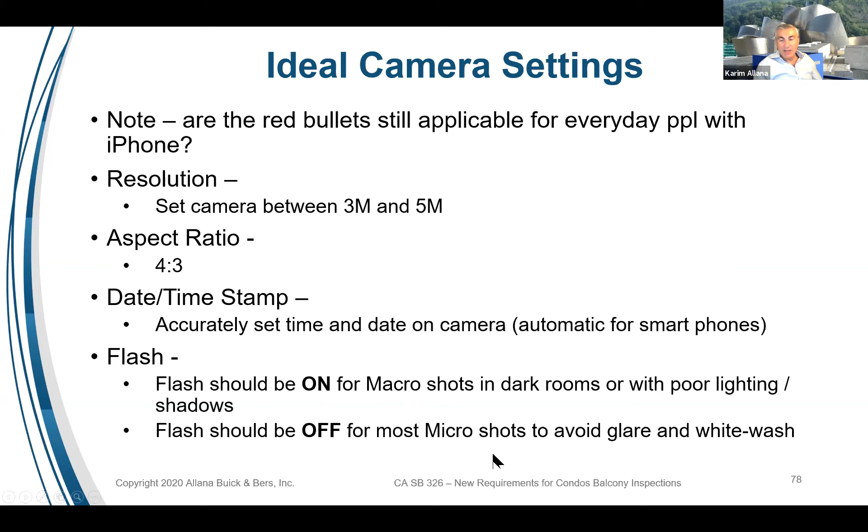They don't actually set the date and the time in the camera, and it's sitting there at year 2000 or something. If the date and the time on the camera is set wrong, then all the pictures you take will have the wrong date. If you're taking pictures with your iPhone or an Android device, it'll automatically stamp the date and the time, so that's a good thing. On flash, try and leave your flash on for darker rooms with poor lighting. And if you're taking a close-up, try not to use the flash, because the glare washes out the photo.

So if you were to take these pictures, we're gonna give you a place to upload these pictures to us, a portal. You'll be able to take 8 or 10 or 12 or 15 photos and send us these photos by filling out a form and uploading it to our website. As these photos come in, we will review them, decide whether there is an issue here or not, and answer your questions. We'll send you an email back.

If we have your phone number and you want us to call you, we'll call you and talk to you about it. But within 24 hours, or at the most 48 hours, anybody that registered for the seminar will receive step-by-step instructions on how to take photos, how to upload them, and how to get these photos back to us. We have a limit of up to 30 photos that you can upload, so they could be full resolution.

You want them to be 3 to 5 megapixels each, and don't try to compress the photos. If they're compressed too much, I can't zoom into them. We can't really look at them carefully. So use uncompressed images with your camera set to 3 to 5 megapixels, and upload those uncompressed images.